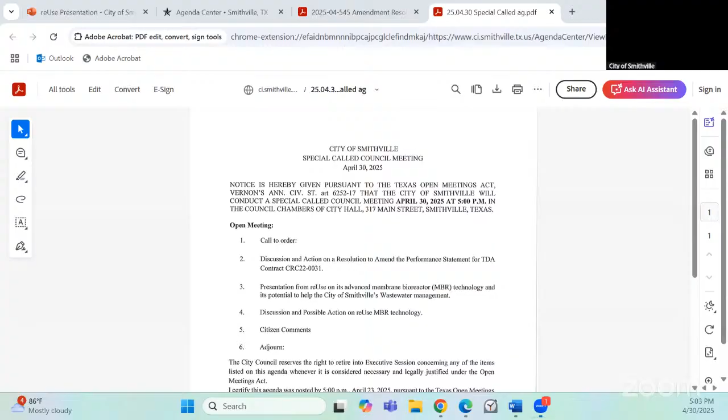You need a motion? Questions? I make a motion that we amend the resolution to amend the performance statement for TDA contract CRC 22-0031. I'll second that motion.

Motion has been made and seconded. All in favor? Mayor, I'm going to abstain because of my newly appointed position on the workforce training board. Will you please note that, Councilman Etheridge? Okay, Kathy was a yes. So therefore, three are yes and one abstained.

Next item. Excuse me, no. Jill, would you please get that signed copy to Angela? Yeah, the deadline's today, by the way, to get this in. So, thank you.

All right, great. Okay, so we can move on to the presentation from reUse on its advanced membrane bioreactor technology and its potential to help the City of Smithville's wastewater management. Okay, Council and Mayor, let me set this up a bit.

This is technology that's been out there probably 5 to 10 years. A group came through about 6 years ago; the technology was extremely expensive and unproven. Since then, we've been going through a wastewater treatment expansion study and have a good picture of what it's going to look like 20 years down the road. We got a hold of these folks, and as the mayor said, this is membrane bioreactor technology. Basically, what their technology does is reduce the footprint and cut the cost. You can eliminate a clarifier using membranes, and they're going to go through this.

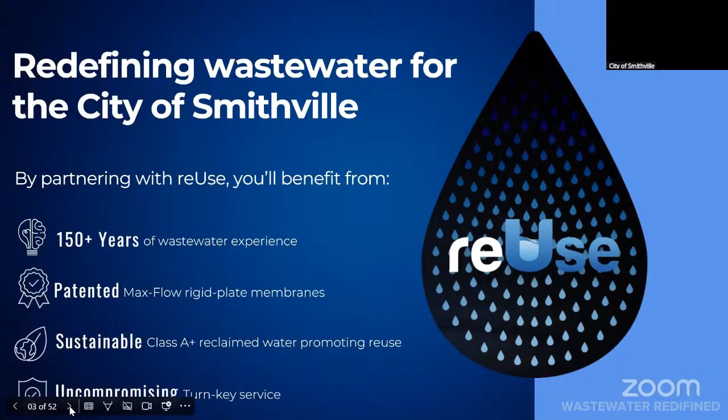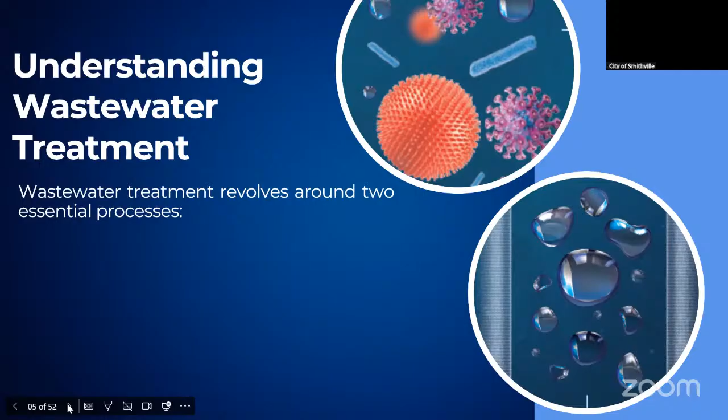Now, how you do that is critical. In any wastewater treatment system, there are 2 critical functions. It doesn't really matter, I could take you to 100 different plants, you have 2 critical functions. You have biology, which I just briefly touched on, and you have water solid separation. So I'm going to lean kind of heavily into the biology and work through that with you so you understand it better. And then we're going to get to the water solid separation, which is the key to what we're talking about with Smithville.

So from a biological standpoint, if I were to take you to your wastewater treatment plant and you look at it, if you were standing on top of that tank, that water should look brown, right? Not trying to make jokes here, I am from Louisiana, so we could come up with those.

But Tyrone, what are you looking at when you look down in the wastewater and you see all this brown? Huh? What are you looking at? When you're looking at a wastewater treatment plant, you see all that brown in there, what do you think you're looking at? Okay, all right. Well, that's what most people think, right? They think, well, it's poo. It's brown, it's got to be poo. It's not, it's not, it's not.

In fact, if you were looking at the water that's actually coming into the treatment plant, it almost kind of looks clear. It's kind of a tinted yellow color water, so it doesn't look like what we would think. But that's because a lot of that water is coming from showers. A lot of that water is coming from laundry.

A lot of that water is coming from your cooking and other functions, so the water coming in is actually not too terribly strong. But when you're looking at that water and it's really nice and brown, what you're looking at is biology.

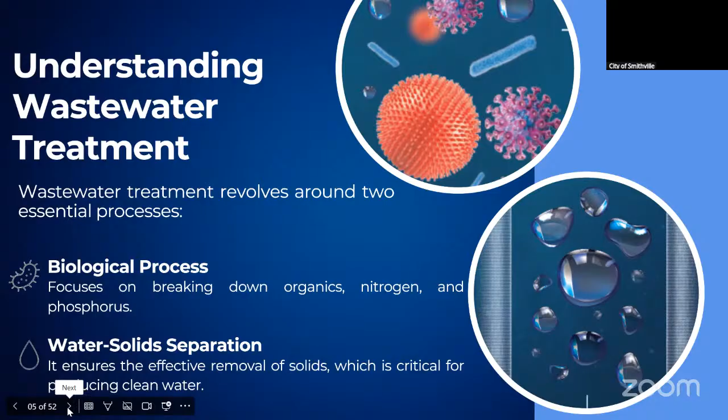That's how you treat the wastewater, that's how you treat those organics. But then you get to a point where, okay, I have water coming in every day, so I've got to get water going out. Well, that's where we come to the water-solid separation. You guys are using clarifiers, and that's what most people see, these big round clarifiers, right?

Tom, can I pick on you since I picked on this side? Okay, can you explain to me how a clarifier works? No idea. Again, I'm from Louisiana.

I grew up on a farm in the country, so I'm going to give you a real simple explanation of how a clarifier works. You have a big pond on your land. You get a really heavy rain. What happens to the color of that water in the pond? It turns green, turns brown, whatever the soil color is, right? It matches it. Why? Because there's sediment in there. If you had rain for 3, 4, 5 straight days, is that water going to clear up? No.

But what happens if you give it 3 days, 4 days, and nice sunshine? What happens to the water in that pond? It clears up. Why? Because it settles. Exactly. Your clarifier works on that same principle, 99% of it.

What you're trying to do, let's go back, is create an environment where as water comes in, you give that water slow movement and time for the solids to settle down. And then you want the water to hit a barrier, go down and up and over, and come out clear on the other side. So you're trying to make your clarifier do what that pond would have done naturally over several days, but now you've got to do that 24 hours a day.

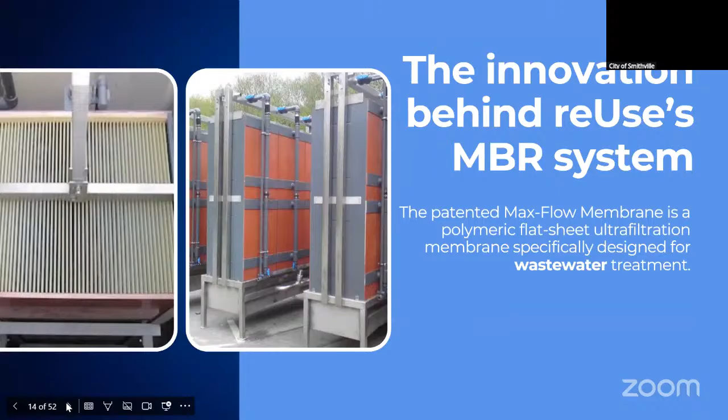In order for water to go through that, it has to pass through a 0.038 micron pore size, 0.038. Well, what is that? Human hair on average is about 100 microns. So grain of salt, 60 microns. White blood cell, 25. Red blood cell, 7 to 8 microns.

Viruses and bacteria, 0.1 micron to a 0.2 micron. Our membrane pore is 0.038 microns. So what does that mean? Well, that means viruses will not pass through the membrane. Bacteria will not pass through the membrane. The only thing that's going to make it through that membrane is water or anything that is of a molecular structure smaller than a 0.038 micron.

So nitrogen dissolved in water will make it through. Phosphorus dissolved in water will make it through. Some of your pharmaceuticals, the molecular structure on some of the pharmaceuticals are so large they won't make it through. Some are smaller and they will. PFAS, that's a big thing everybody talks about, right? EPA's trying to figure that out. It's going to be a while before they figure it out. PFAS is a short chain molecule. It'll pass through. But bacteria won't make it through. Viruses won't make it through. Solids won't make it through.

So how does that change things? Well, if we know that those things aren't going to make it through, then all we really care about at that point is hydraulically, do we have a design that will allow those peaks hydraulically of all that water to come through without compromising the biology inside the plant? And the short answer to that is yes.

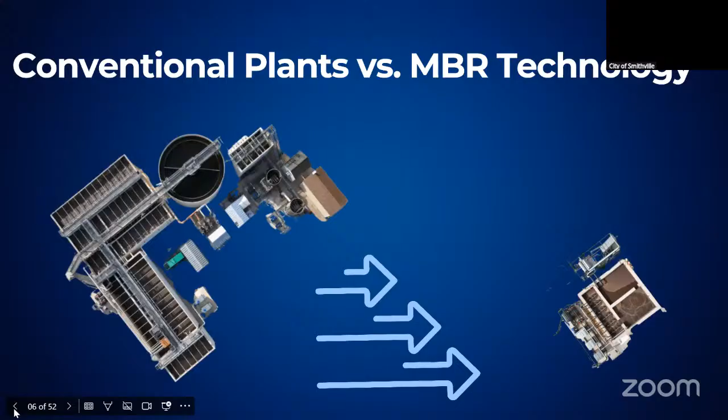So with our membranes, we operate them in a very conservative operational range. When we have those peak flows in the morning, in the evening, when everybody's getting ready, or on the weekends, we don't worry about that because as the flow starts coming in faster, we simply speed up on the backside how fast we're pulling the water out. So we're just worried about passing the water through it hydraulically, but we're not worried about the solids because they're not going to make it out. The viruses aren't going to make it out. Bacteria is not going to make it out.

Well, if we know that, then how does that change the way the plant looks? How does that change the way the plant's designed? This is a good example of a treatment facility that is of similar size to the one you have here. The one on the left, that's a 250,000 gallon per day plant. I think you guys have a 300. Am I doing it right?

Now, I talked about the way that people handle those peaks. I think your plant is designed, and you can correct me if I'm wrong. Who's on the wastewater side? Okay, so your clarifier looks like it's oversized. You don't have an EQ basin, right? Okay, so they chose what we talked about earlier. One of the two ways you can handle equalization is either an EQ basin up front or oversize the clarifier. You chose to oversize the clarifier. This one, they chose to size the clarifier for the average, and they have an EQ basin here to handle those peaks. But the footprint still stays about the same.

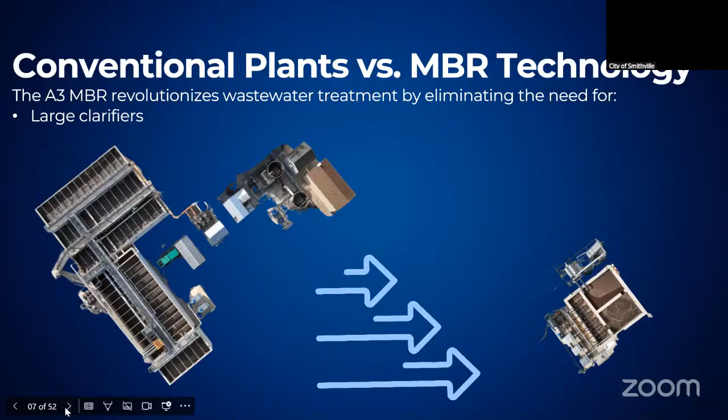Okay, when you talk about the membranes, well, we don't need the EQ basin anymore, right? So we don't need the clarifier. That's the first thing. We replace the clarifier because we've gone from a passive separation of water and solids to an active separation of water and solids. So we don't need the clarifier. So that goes. Next goes the EQ basin. We don't need an equalization basin. Then we get rid of the sludge digestion. Now, you guys aren't doing sludge digestion here, are you? You are. Okay. Are you hauling the sludge away?

Drying beds - okay, we eliminate the drying beds. Would that be helpful?

Okay, so I'm going to speak in some terms that these guys hopefully will help me with. One of the reasons we're able to eliminate the sludge is because of how you're operating your plant, within a certain range on mixed liquor. Mixed liquor is just a way we measure the percentage of solids, or bacteria, or biology, that's in the water versus the water. So you're operating around 3,500 to 4,500 mixed liquor, which means about 0.35% to 0.45% solids. The rest of it's water.

It's very, very low. In order to do sludge digestion, you have to thicken that up, right? If you're going to take it out of the drying beds, you've got to thicken that up to 1.2 to 1.5% solids. That's what our operating range is - not 3,500 to 4,500 mixed liquor, but we operate between 9,000 and 16,000 on the mixed liquor.

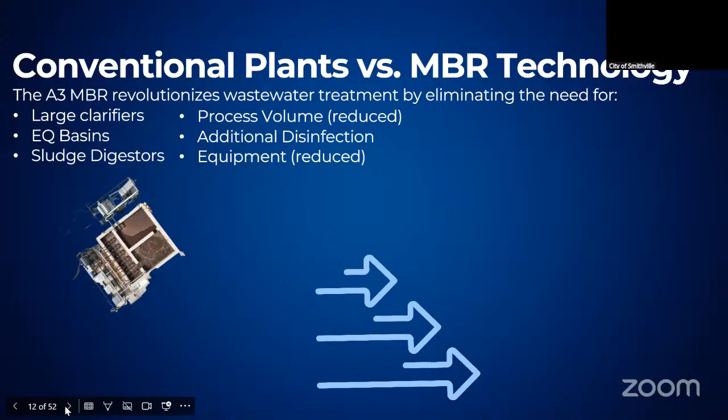Just to give you an example, what you're seeing on the screen is basically a 200,000 gallon per day plant where the entire plant is 32 feet by 36 feet. That is a really small footprint. Do you have any idea what size footprint you guys have for your plants? It's probably bigger than 32 by 36.

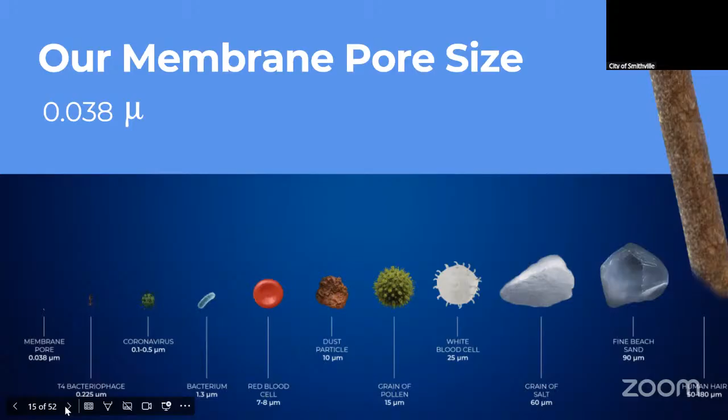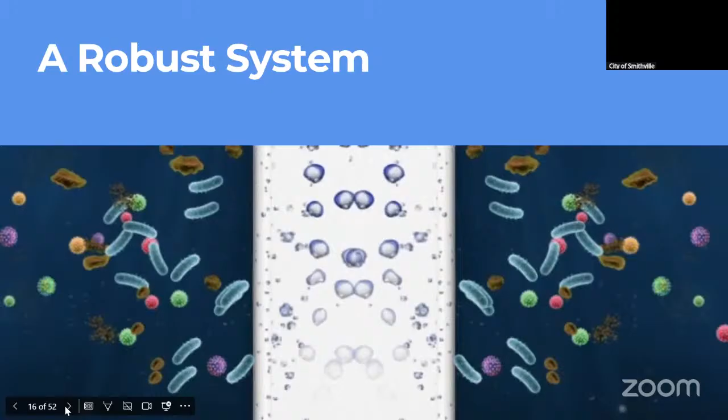What percent reduction of the footprint do you get? Typically, we reduce the footprint by about 60%, sometimes more. It really depends on a couple of factors - whether you have an EQ basin, how big your chlorine contact chamber is, several different factors - but we're going to reduce it by at least 50 to 60%. We've seen plants reduced by as much as 70% on the total footprint.

This is just a kind of a visual, if you will, of how the membrane works. I'll let Gabby hit the play button. So the water - we put a vacuum on that membrane. You still have it out? Where'd it go? Yes, here we go.

So we put a vacuum on the center part here. This is a hard corrugated inner component that we put a vacuum on, and that vacuum pulls the water through this membrane into the center part and out. But as you can see, viruses won't make it out, bacteria won't make it out, solids won't make it out. So that's in essence what we're doing - we're putting a gentle vacuum on the surface of the membranes and pulling the water into the membrane and out. Okay, keep going, Gabby.

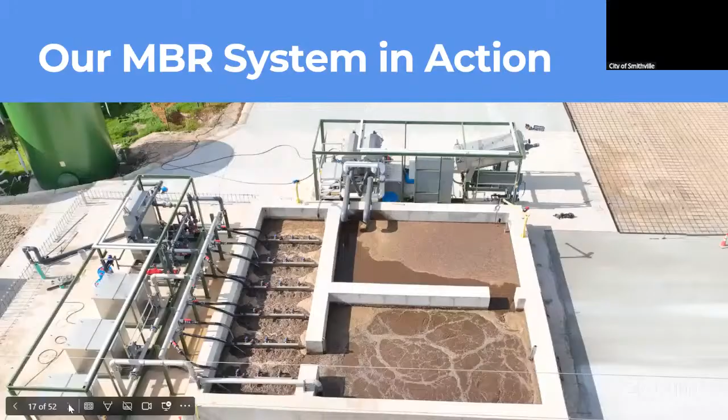All right, so here's an example of one of our plants. It's down in the Castroville area, San Antonio. This is for a residential subdivision, a 200,000 gallon per day plant. What you're going to see on all of our plants is they look very much the same. It doesn't matter the size, whether it's 200,000 or 2 million gallons per day, they just shrink or grow. The footprint changes based on volume, but the design stays the same.

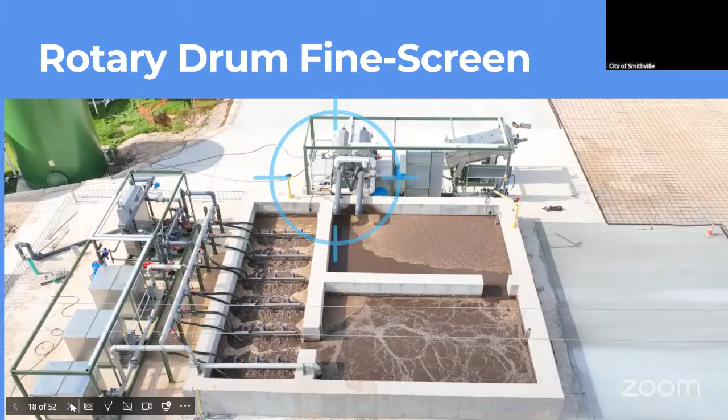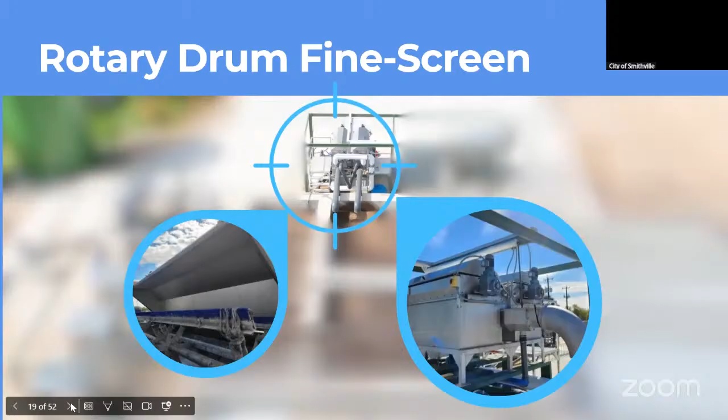If you look at the top, we have screens. That's where the incoming influent hits it, and we screen out all the trash we don't want. That drops into a dumpster, and it's a fully automated system.

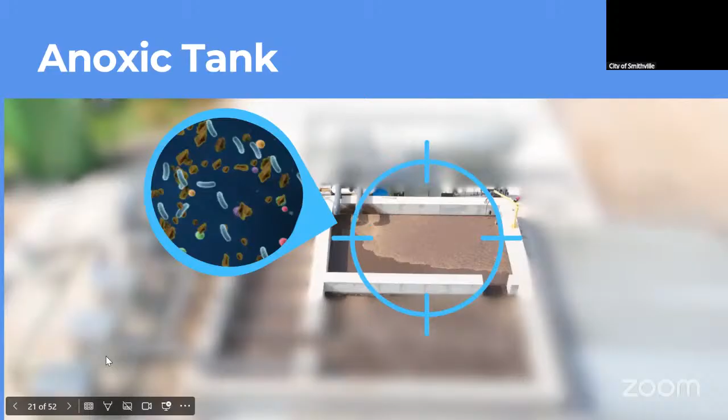It goes into an anoxic basin, and that anoxic basin is one of our primary processes. When we talk about biology, the anoxic basin serves a critical function in wastewater. It's where we do most of our phosphorus removal. It may not make a huge difference to you today, but 5 or 10 years from now, it is going to make a big difference.

One of the key things the state of Texas, TCEQ, is cracking down on is phosphorus limits, even for cities. Most plants coming out now, if they hit the Colorado River, which yours will, you'll probably see your phosphorus limits drop to 0.5 on your next renewal or the one after. Up in the Austin area, they have phosphorus limits as low as 0.015, which is impossible without doing it chemically. But most plants we're seeing now are at 0.5. You're not there yet, but you will be eventually because TCEQ is cracking down on that.

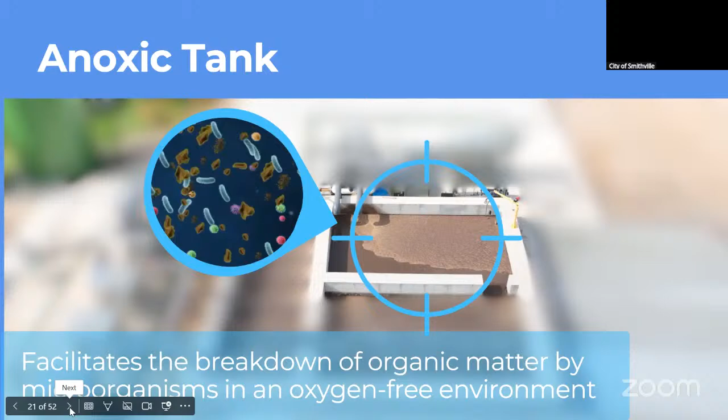This anoxic basin is a critical part of that process in order to help foster bacteria that loves to eat phosphorus. In our plants, we typically average 0.4 on our phosphorus effluent, which I understand is foreign language to you guys, but over here, you guys understand that, right?

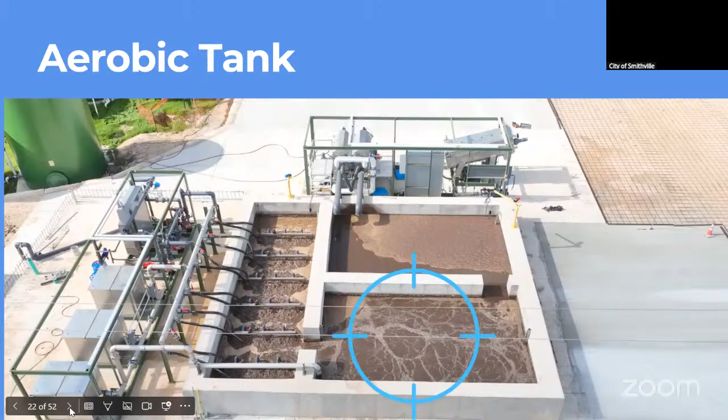So they'll appreciate that. But then we go from our anoxic to our aerobic basin, and this is where we introduce oxygen into the system. Now Kathy, I've picked on everybody else - what good does oxygen do in a system? Why do we add oxygen to it? It provides air into it. Well, it does, but what good does the air do us? Or should I get one of these guys to explain it? Okay, let me tell you about it - let's go back to biology.

When those bugs are coming in, there's no oxygen in your gut, right? So you have anaerobic bacteria in your gut. That same bacteria is still anaerobic when it's going through the collection system, and still anaerobic when it hits that treatment plant. Now let me tell you about anaerobic bacteria - they're like my dad. He's 6'4", 350 pounds, sits in his chair. He does not need much food to survive. In fact, he could probably go 8 or 9 months and he'd still be just fine. He might look a little more like Tyrone here, but he'd be just fine - he's got enough capacity that it's not going to bother him. Anaerobic bacteria are the same way. They eat very slowly.

But when you introduce oxygen into that process, what you're doing is turning those bacteria, Kathy, into the Michael Phelps of the world - the ultra athletes who have to consume 10, 12, 15,000 calories a day just to make it through the day. So when you introduce oxygen, you're creating an environment where the biomass will consume the organics 10 times faster, 15 times faster, 20 times faster. Depending on how you deliver that oxygen into the water, you're actually giving the microbes fuel to change their biology, and they'll consume the organics faster.

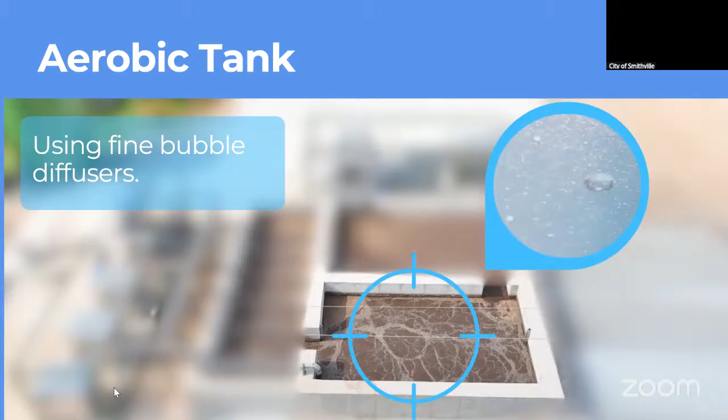So we employ fine bubble diffusion. I'm not going to get into that - it's a whole other discussion. Let's just say it's the most efficient that there is. But we do that so that we can energize the system and make sure we have a robust process there.

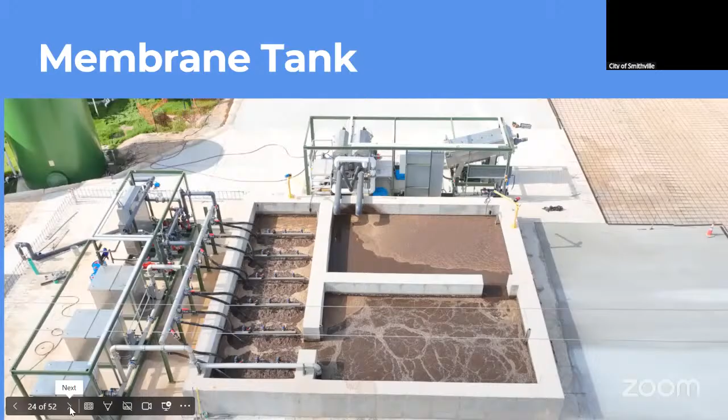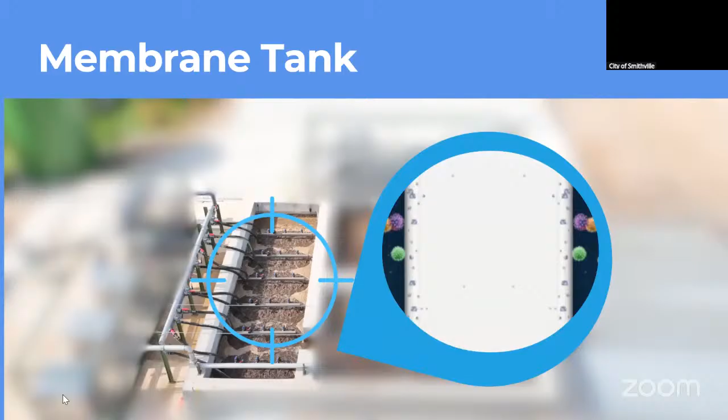And then we go to the membranes, and that's where the key is. These membranes are the key to the whole thing. When we submerge the membranes down in the water and put the vacuum on them, they pull clean water out of that brown mixture. Yes, it has a little bit of dissolved nitrogen and phosphorus in it, but it's water.

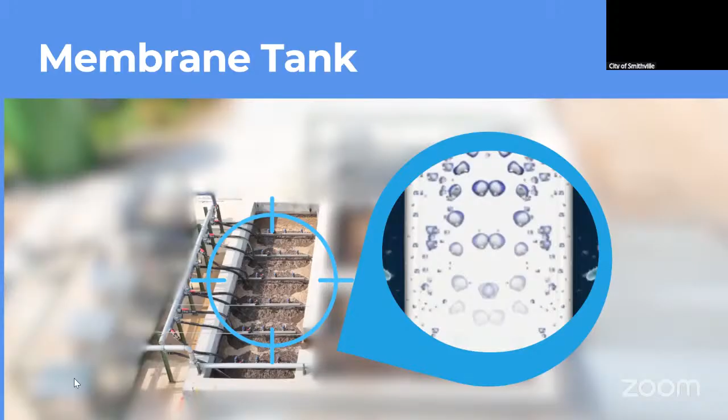It's going to be clean water. It's a resource. Jim, would you like to have clean water coming out of your plants? That's a resource. You saw the video I showed you, that's coming from this plant. I showed Jim a video, I'll show it to you guys as well. From this plant, they're producing water that goes into those green tanks up here in the upper left.

And those green tanks are going out to the community, and that's what they're using to irrigate all their homes. So what does that do to their potable water system? Well, they've just reduced their demand for potable water in that subdivision by at least 40%, because now they're using this water, not effluent. It is effluent—technically, TCEQ's listening, it's effluent—but it's water. They're using it to irrigate all their systems, all their lawns. More importantly, they're not paying potable water rates. They're actually paying about 60% of the potable price for this water.

So they're reducing their water bill overall, and they're reusing this water, but in a way that helps fund the system, because they're using it as a utility. The homeowners still save money, the utility saves money—it's a win-win for everybody. They couldn't do that with some of the conventional systems, especially some of the older plants. Couldn't do that. With this, they can.

What's your distribution system for getting the second type of water to the homes? Yeah, you'll have a second distribution system. It's going to be a lot smaller, a lot more effective system. But there is a cost. Each home would have two meters—a potable meter and a reuse meter.

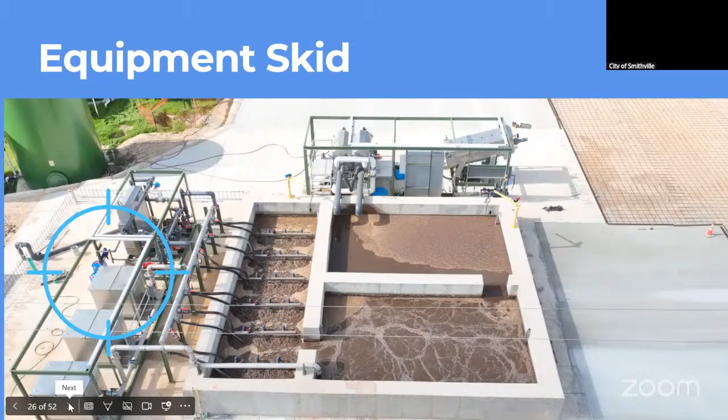Yes. Texas has an addendum to your permit, a 210 reclaimed water system. If you meet certain levels, type 2, type 1, et cetera, which this meets all of those, then you can use it in a number of activities. You could use it in parks, recreational areas, a number of different things. But yes, you can use it for construction, dust control, things of that nature.

Is it all or nothing? Can some residents choose to have the second meter and others not, or is it all or nothing kind of thing? I think if you're going to put the infrastructure in, you have to just plan on it going for everybody. That's my opinion, but I don't think you spend all that cost without making sure that everybody has that access to it.

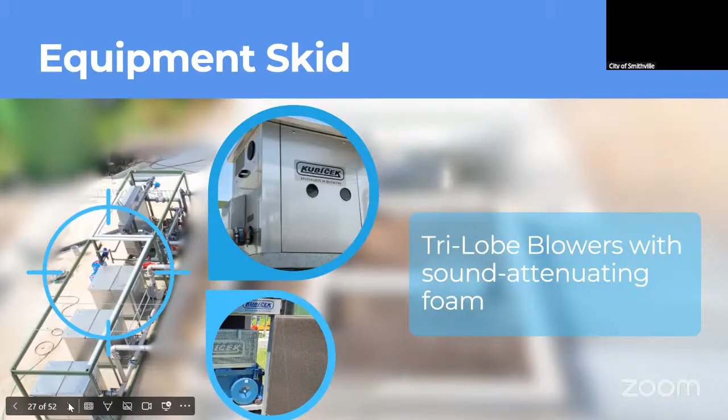Okay, keep going. All right, keep going, Gabe. We're gonna try to get through this because I was told at the very beginning by Sharon not to talk long, which I've already blown past that.

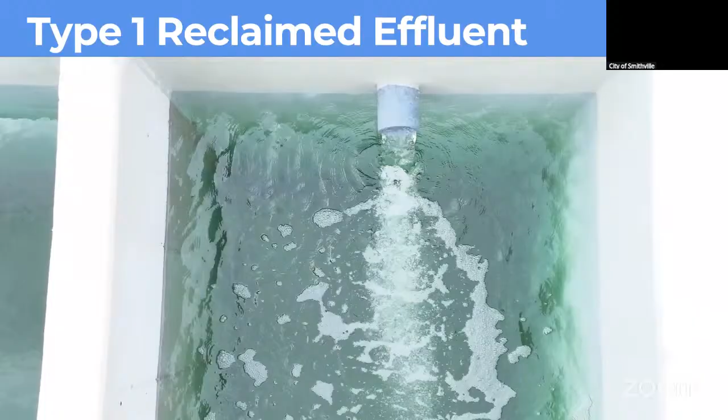Okay, this is our effluent, right? This is the water coming out of that plant you just saw. We had that water tested at one time. We ran a full water panel for VOCs, volatile organic compounds. Now I'm only talking about VOCs, but it actually met US safe drinking water standards. That's how clean it is.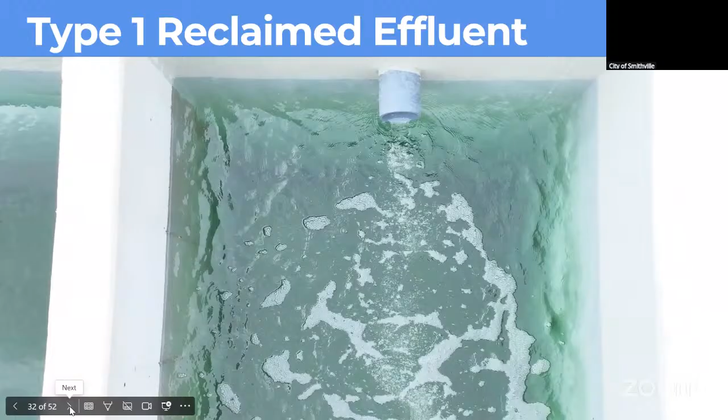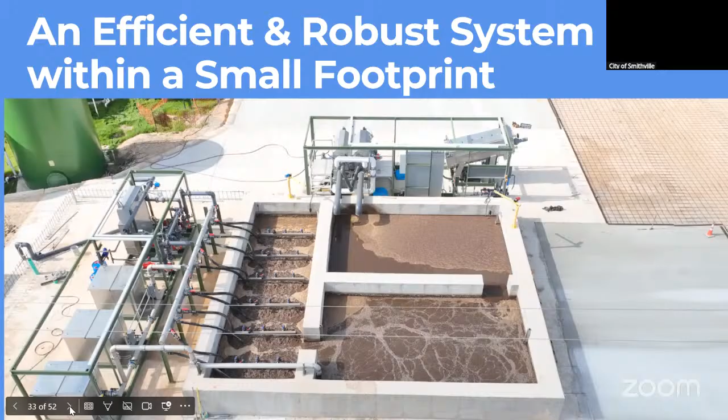Would you drink it with me, Sharon? You guys would drink it with me, wouldn't you? All right. I'll take you to any one of our plants and I'll drink the water coming out of it. I will. The reason is I know what's not in it - I know there's no bacteria in there, no viruses in there. Some dissolved nitrogen, that's fine, dissolved phosphorus, but I grew up in Louisiana, so I've drank a lot worse, you know?

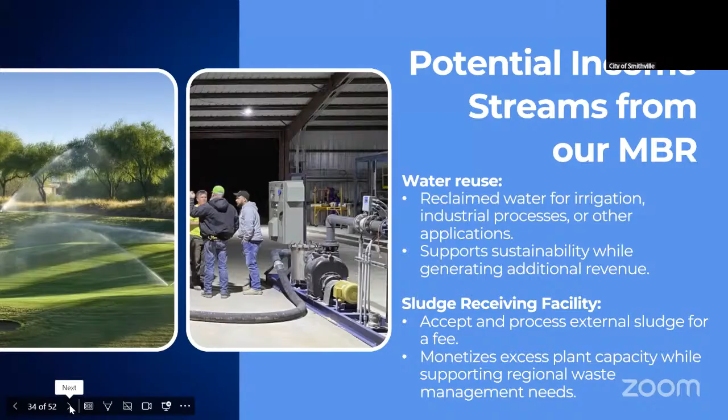So let's kind of get to what we can show them. So for you guys, what does that mean? I went into all that to show you.

Keep going, Gabby. Right now at the Gazley wastewater treatment, currently permitted for 0.5, processing approximately 0.162. The proposed upgrade is to construct a new 0.5 MGD MBR facility. Then at the Willow plant, currently permitted for 0.3, processing 0.141, and the proposed upgrade is to construct a new 0.5 there as well and amend the permit for the increased discharge, and of course the lift station improvements.

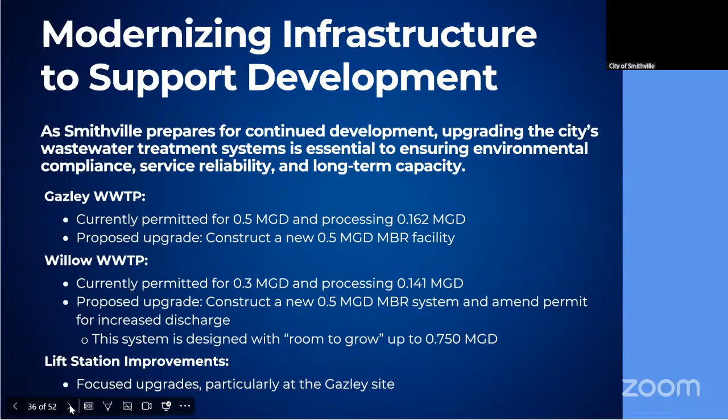So keep going. All right. So currently, if you look to the upper left, that's what you have for your conventional plant. You've got your bullseye plant that has the clarifier, has your aerobic, all that there, and then you have your sludge drying beds over to the left. If you look to the right...

Inside that white box - that's the outline of just the plant. That's a 500,000 gallon per day plant right there. Now that includes the automated screens, includes a sludge press, includes all your equipment. We even have inside the white box a room for a new office, storage space, et cetera. But that entire 500,000 gallon per day treatment plant, if you look to the left there inside the white box, is smaller than your current 500,000 gallon per day plant, right? And it is going to be more efficient.

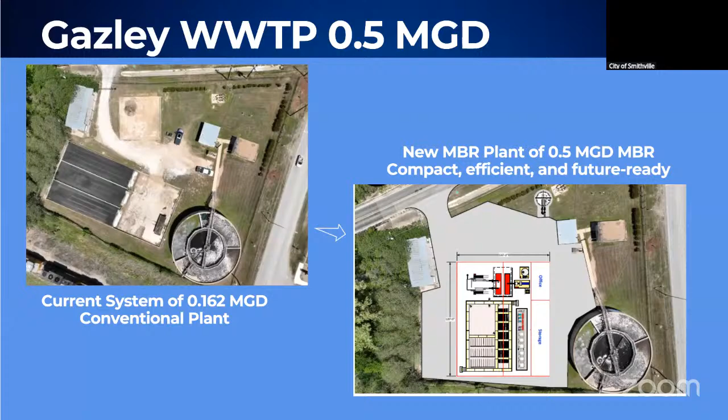Everything is fully automated. It has a full SCADA system so that if you wanted to check it at 2 in the morning, at 2:59 a.m. and 37 seconds, you can pull it up on your computer and see every flow meter. You can see what mixed liquor you're running, what your dissolved oxygen is, how much water is coming in or going out, the life expectancy on your UV bulbs. You can see everything in that plant from your computer. So it is fully remote operational.

You guys don't get any remote operating capabilities? They do, but it's a fully SCADA system. So you can see and do anything that you could at the plant remotely as well.

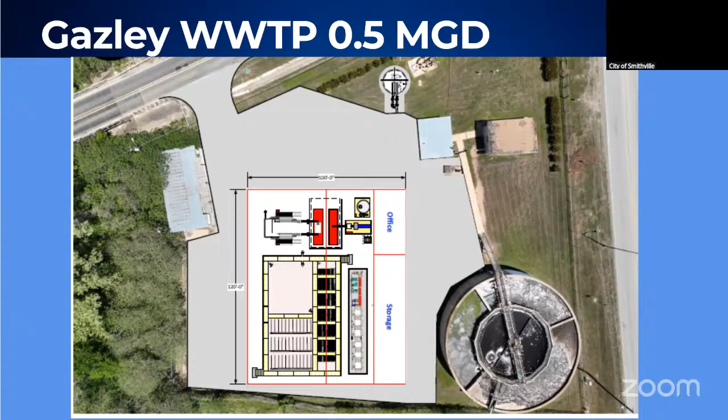These treatment plants are typically completely under roof. We put them under roof for a couple of reasons. Reason number one, once construction reaches the point where the concrete tanks are poured, we put a red iron building over the top, not an enclosed building, just under roof, so we can work there the rest of the time in the dry. It saves us typically two months of construction time because we could work 24 hours a day if needed. We also have lighting under there so we're not limited by daylight hours or weather events.

But the other thing is all this equipment in there is heavy equipment, and underneath that roof is a monorail crane, so if you need to pick any particular equipment up, you can just pick it up, move it out to the end, and set it down. It's kind of an operator-friendly situation, we're trying to make it good for these guys.

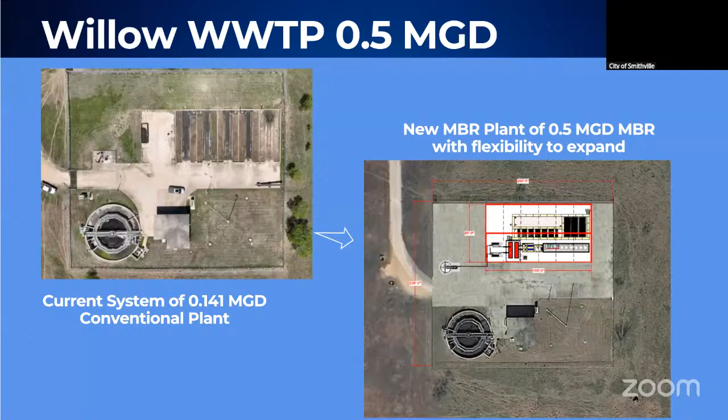Now, Gazley may be a little bit different. It's kind of an odd configuration, so we'd have to look at that. But I would say at Gazley, you'd still be able to double, potentially triple your capacity.

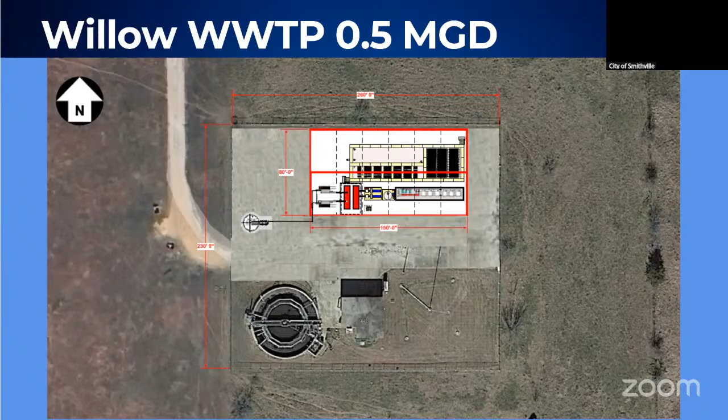This really goes back a long ways, because most people think, well, they're smelly—and that raw water coming in, it is. And then there's a lot of noise. You have your blowers in buildings out there, so that's one of the ways you reduce your noise, by putting them in buildings.

The blowers that we have are tri-lobe blowers. They're in a stainless steel enclosure that has 3-inch sound attenuating foam built into it. So the blowers themselves run around 72 decibels—my voice is around 75, so it'd be about the same level as my voice. You could stand right next to them and it'd be about the same volume that I'm talking right now. Part of that noise and odor abatement is because you don't want to have a nuisance.

But there's 3 ways to address noise and odor at the plant. The one that everybody picks is a 150-foot buffer. But you can do like we do—you can have sound attenuating enclosures that limit the noise, and you can have ways like our screens are sealed, so you won't have any odor at the screens. Now, if you open them up and leave them open, you're going to have odor, but if you keep them closed and let them do their job, they're going to be sealed and you won't have any odor.

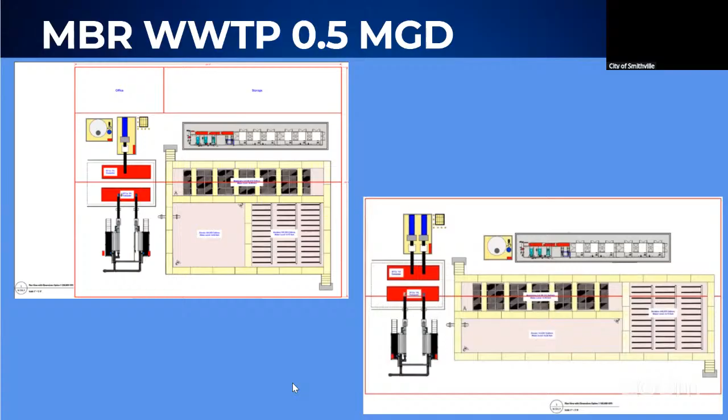Okay, keep going, Gabby. So this is kind of what it would look like. If I were looking at it from a side-on view, your tanks would be submerged. They would be about 4 feet out of the ground. You'd have the catwalks there, you'd have the building overhead with the monorail right in the center of the top of that building. But that's kind of what it would look like.

Did you put any pictures in here of what some of our other plants look like? You didn't—we'll get those to you.

We have plants that have utilized covers in buildings. Ski resorts, they put one over, it looks like a horse farm. There's one in West Virginia, and you've got one in the mountains of Carolina—it literally looks like a high-end log cabin. They've enclosed these and put shelters around them to keep them looking aesthetically pleasing. I don't think you need that there, but we're still going to have a building over it, and we're going to make it look good. The building serves a vital purpose for operational and construction purposes, but we're still going to make it look good.

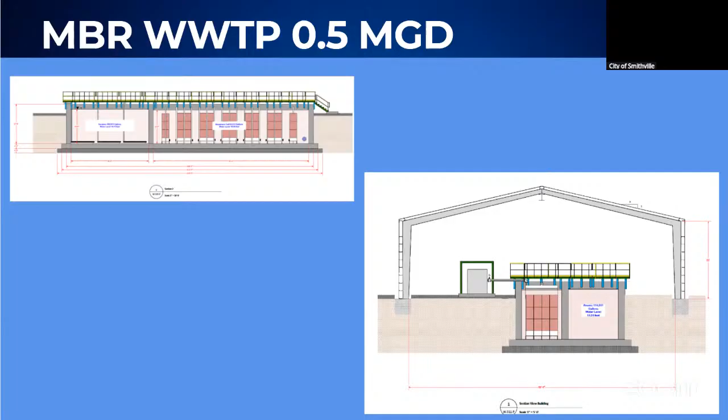Wet well, influent lift station, you guys need an upgrade. I'm gonna let Gabby, we utilize a wet well, and this is really more for the operators than anything. Our wet wells that we design and install are made out of HDPE, so they have a 100-year life.

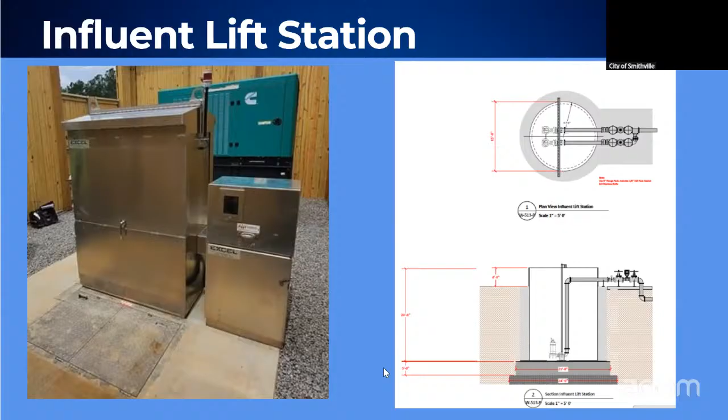We can size them up to 11 feet in diameter and 50 feet deep. They come fully assembled, and what we really like is what you see in this picture. It's called the no vault system, so we don't have an in-ground vault valve or vaults above ground. Can you get to that video? I'm gonna turn your attention to this and let it run for a second.

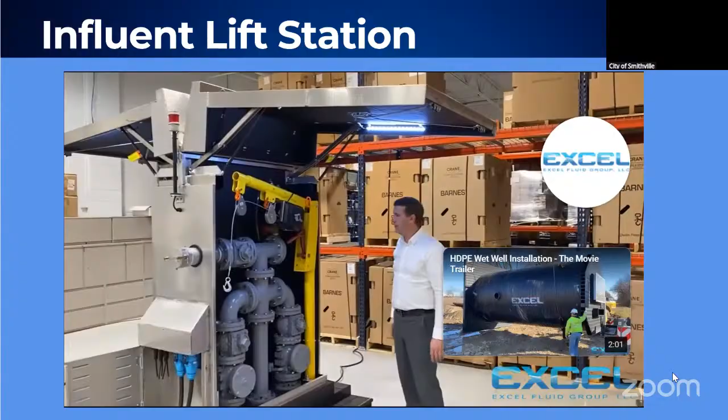Does that look different from what you guys are doing? Yeah, a bit. So that's what we would recommend.

It's a long life with the HDPE. Right now, if you have concrete, you've got to recoat that concrete. Hydrogen sulfide is going to eat away at that thing. And we always use either stainless steel piping or HDPE. HDPE is going to have a 50 to 100-year lifespan. Stainless steel is also going to have a high lifespan. So different quality all the way around. That's what we're proposing.

When you look at everything that we do, all of our air piping is stainless steel. All of our water piping is stainless steel. All of our controls are stainless steel enclosures. We have our blowers, stainless steel enclosures. UV disinfection, again, is stainless steel. So it's the highest quality you're going to get, and yet I truly believe we're going to save you guys some significant money.

I'll give you a couple of quick examples, and then we're going to turn it over to Robert. We had a city up in the Dallas area that sent out a bid for a conventional plant design. It was a 250,000 gallon per day plant. The city had certain gold-plated requirements they wanted for that plant, because the developer was paying for it, so the city added some things in there. That being said, the bid came in at $17 million. They decided that was way over budget.

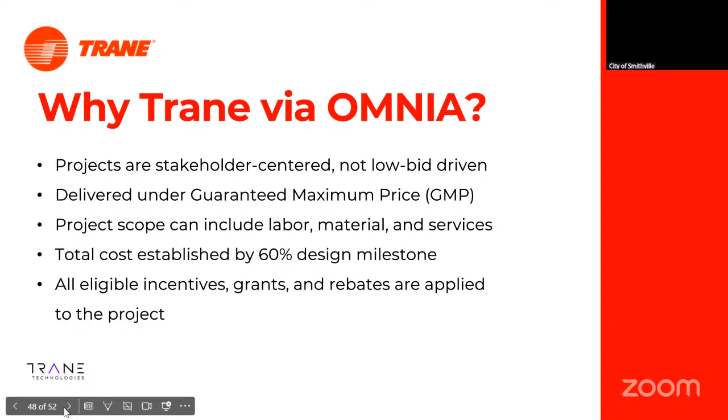So this design build process is actually from some wastewater treatment plants that we built up in Washington, and it doesn't actually accurately describe what we would do within Texas requirements. Within Texas, we have to separate out the design aspect of it from the construction aspect of it, so they would be two separate contracts. Some of these responsibilities would fall on Reuse as essentially your design engineer, and then Trane would come in as your construction contractor and your project manager there.

We would work obviously alongside Reuse in the design phase because all of that pre-construction, all the pre-construction aspects, we would be working with them and with you to make sure that we're reducing costs and doing that effectively. Let me see if there's anything else missing from that. Yeah, so I think it would be more of a two-step process with the way that we'd have to work under Texas requirements.

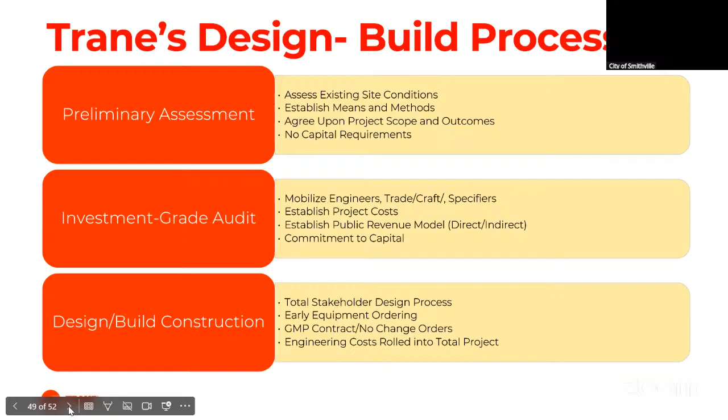And then finally, there's a lot of words on here. Most of them we've actually covered already, as quick as that was. One of the things I would say, though, is that with Trane...

What we bring to this, obviously, is a large $14 billion company. So when it comes to completing the design phase, we will be able to pre-order some of the long lead time items. Any requirements around surety bonding, with a big company like us, that's not going to be a problem. You also have the rigor and stringency of our supplier management process, which can be quite arduous, but it de-risks things in that all of the suppliers and subcontractors we work with have been fully vetted. Quite honestly, any equipment or subcontractor we work with, we would always have two others as backup. So there's a lot of assurance around us project managing it and contingency managing.

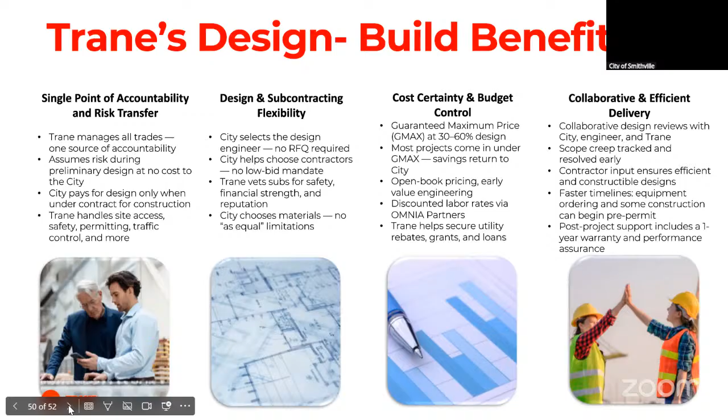So from a city perspective, I guess what you want to do is maximize the benefits and minimize the risks, and this slide addresses that. This is obviously fully compliant. First of all, this is going to comply with any state legislation on how you go out to bid and procure. You've got cost risk within the structure of Omnia. You've got budget assurance—we're going to provide you with that price guarantee. And you have the confidence of working with a large multinational Fortune 500 company like Trane.

You ready for questions?

Ready for a question? So effectively, Trane is the assessment, planning, and design process—that's what you guys do? No, the design is going to be Reuse. Reuse will be the designer of the system. When we get into the construction phase, Reuse is a consultant to us, if you like. So they will be involved from start to finish.

How do you eliminate the RFQ requirement? It's within these cooperative agreements you're allowed to do that—you're allowed to piggyback. The original agreement we have has gone through that procurement process, so it's been fully vetted and follows all the requirements. You're piggybacking off it. I got the nod from the city manager, so that's what I needed. Thank you. It's like BuyBoard or Choice Partners—they're pre-screened and approved, and you're allowed through procurement to do that without competitively bidding because they've already been vetted. Exactly, yeah.

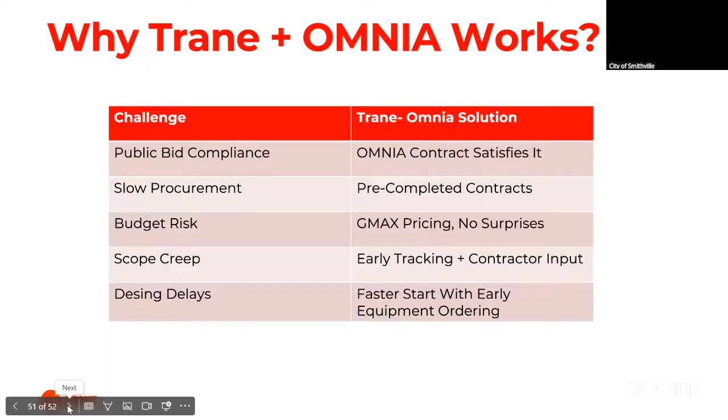Difficult to say, but yeah—we get that question all the time. So the parts are typically going to be sourced from Germany and France. That's the blowers and the permeate pumps. The controls are built here in the United States. The membranes are built here in the United States. So all of that is sourced here in the U.S. The blowers and the pumps are the two things coming from Germany.

That being said, right now we know there's the potential for tariffs. We've actually built into our pricing 35%. We hope that there comes to be an agreement that brings that down, but right now we've priced everything at 35% tariffs on those items coming from Germany, which again are the blowers and the pumps.

Yeah, so where I was going with this was with the GMAX pricing, which is generally perceived as a de-risker. We all know there are some caveats—I think he alluded to the 60% mark being when you lock things in.

Yes. So how much financial commitment would the city have before we got to that 60% GMAX threshold? How much would the city be responsible for? How much would they have? So before we got to the 60% threshold where we really know we have a GMAX, how much of a legal commitment to the deal have we made, and how much money have we spent?

So, I think the short answer is at that point, you could still back out. The way it's structured, you wouldn't have to pay for the engineering study at the front end—it would be built into the construction contract. So if you did back out at that point, you would pay for the engineering work and you would own any intellectual property associated with that, but you could back out at that point.

Given the add-on of tariffs, which is certainly a unique environment we're in today, how does cost savings under GMAX work? If we end up with less than the 35%, do we get 100% of that, or is there a cost sharing arrangement with the contractor?